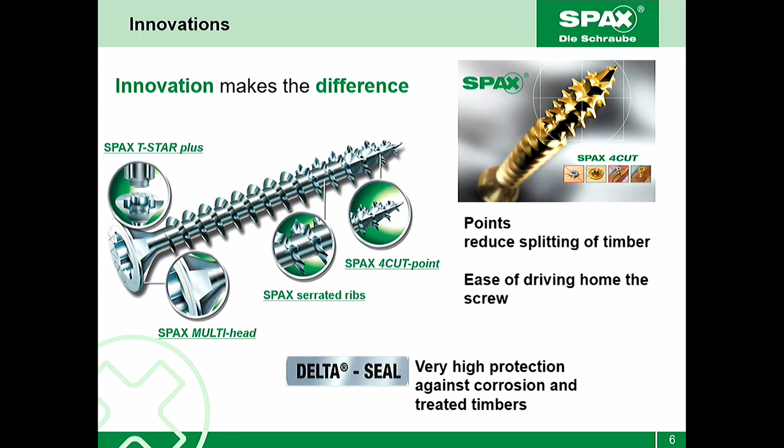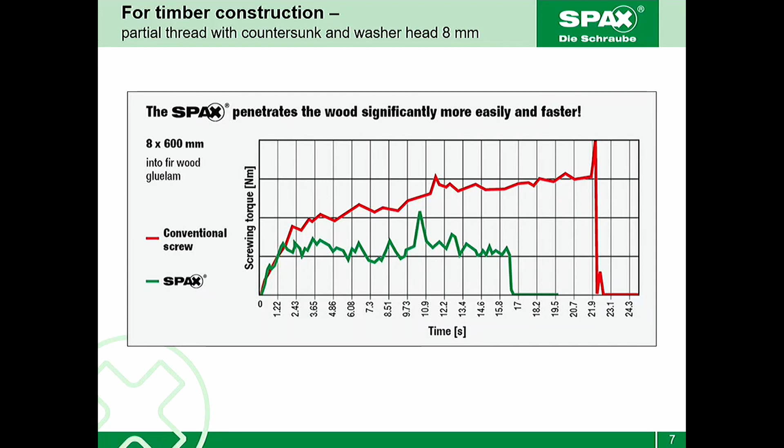Everything is made in Germany. We've still got the original plant, obviously expanded quite a bit and modernised after 194 years. So made in Germany, we can guarantee the quality of the products. We can provide a certificate of origin as well, what we call a TÜV certificate. So we have a clear commitment to the quality and security of our products.

I went over to the plant, the factory, beginning of last year, and I was just amazed at the quality control. Every single step of production, they're checking, and if something goes wrong, they get rid of the whole batch since the last check. They have computers checking the threads and everything like that, and once it comes back from the platers, it's checked again.

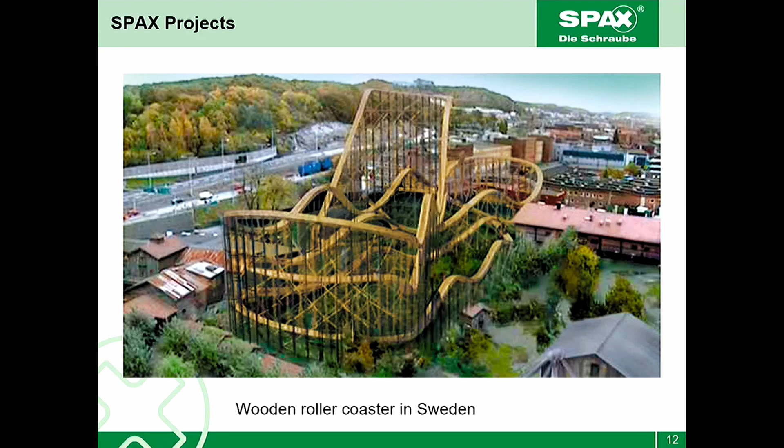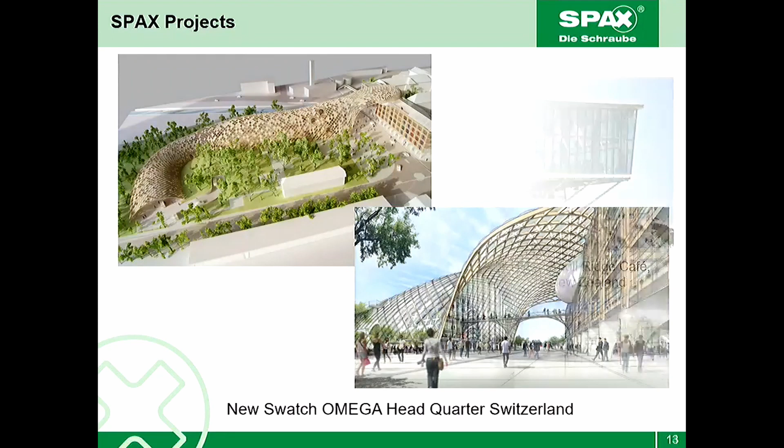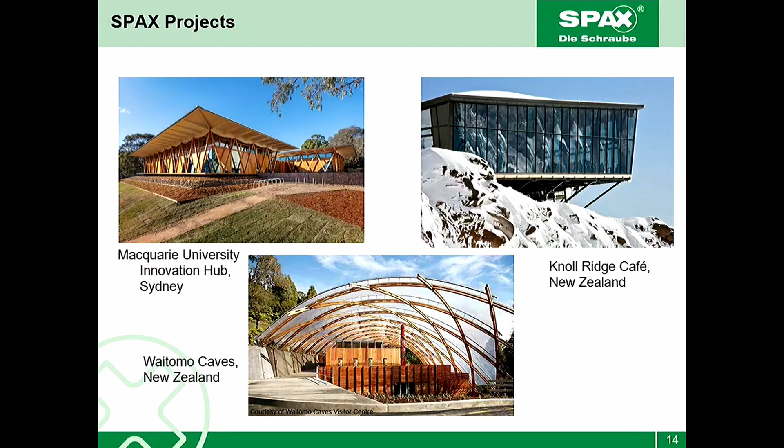A couple more local ones. You would have seen the Macquarie University Innovation Hub, which won a design award a couple of years ago. Knoll Ridge Cafe at Whakapapa, Waitomo Caves Visitor Centre as well, all SPAX screws. Catholic School in Sydney, Bunjil Place in Melbourne, won last year's Timber Design Award. That's an amazing structure as well.

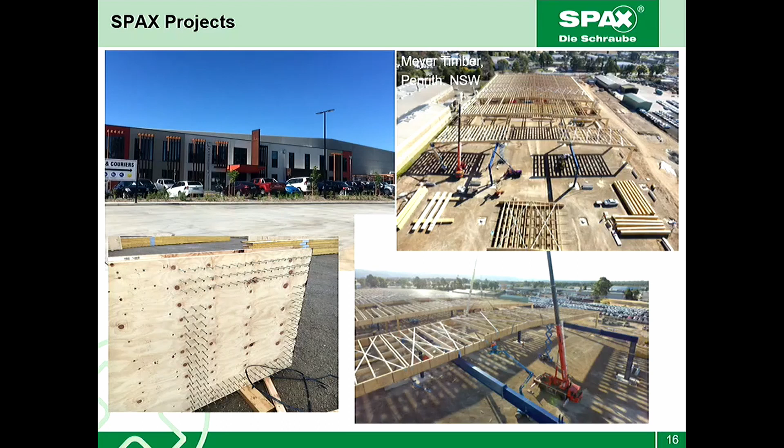Meyer Timber warehouse in Penrith. I don't know if you can see that very well, but quite large spans for your timber. And how it worked was, it's like a tongue and groove connection. So your tongue basically fits in here, you'll see this is cut out there, and it's just joined with all these SPAX screws around it. So that was a very clever design as well.

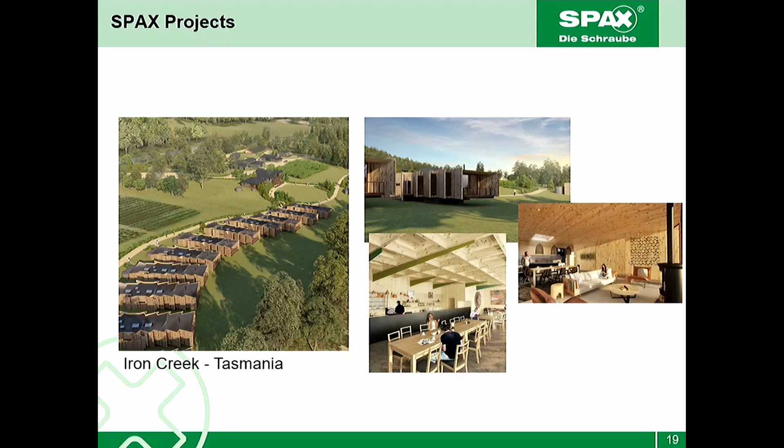Otago Polytechnic down the South Island, there's a lot of screws in that with XLAM as well. Housing New Zealand, so they're using all SPAX screws for that as well with the CLT. The new one is just starting this month, which is Iron Creek, Tasmania, which is a backpackers hostel. And that's my backyard, so we use SPAX screws anywhere.

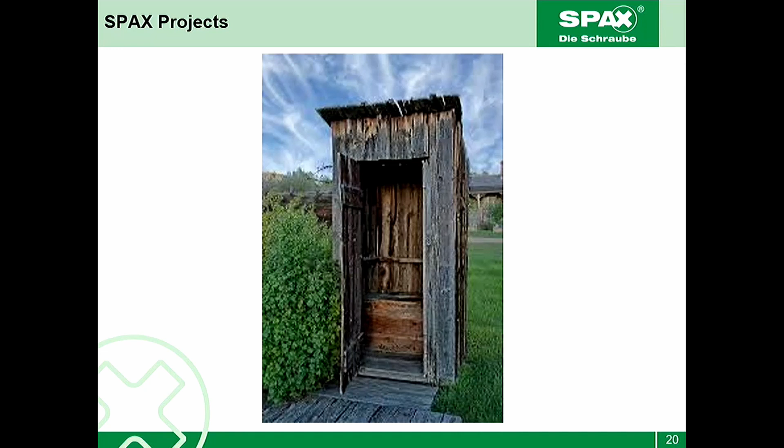Okay, so when you're looking at screws, there's different connection types you need to be looking at. Other areas like bolts, steel plates, coach screws, gang nails, things like that can be replaced these days with a modern screw.

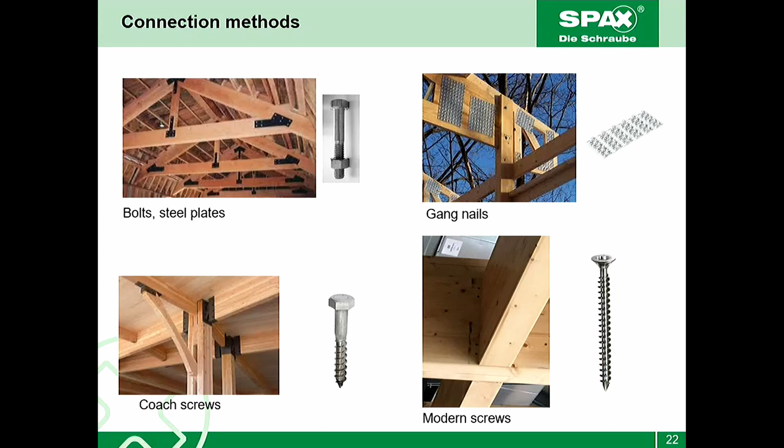Now, what are the advantages of modern screws these days? You're looking at aesthetics as a major one. So instead of having plates in a situation like that, you can use screws which are completely concealed, and you get a connection that looks like that. That was actually at Bunjil Place in Melbourne, those connections, using a lot of fully threaded cylinder head screws. So aesthetics is one advantage.

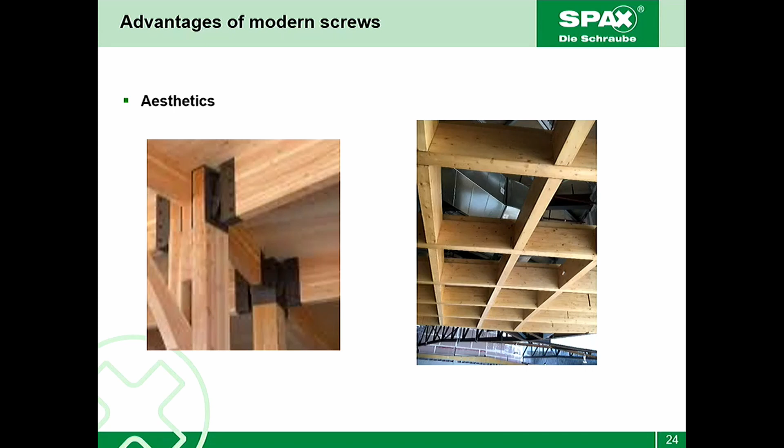Another one is fire reaction. Your screws can be driven inside the timber, below the char zone, so they're fully protected from fire. They're good for earthquake situations, for seismic - they're a ductile connection, and obviously ductile connections are preferred in most situations that way.

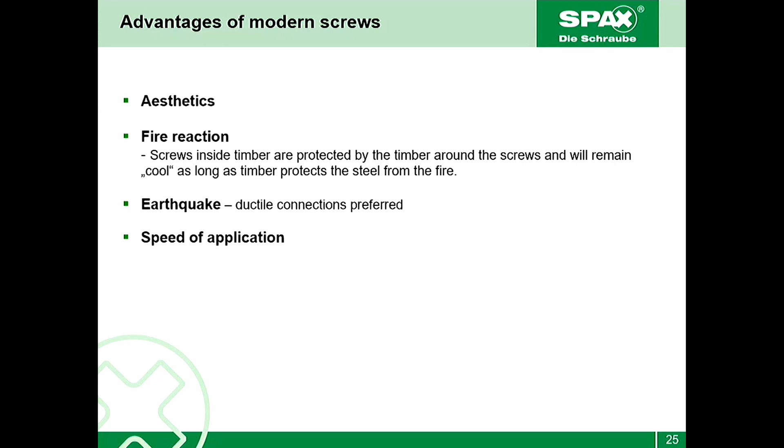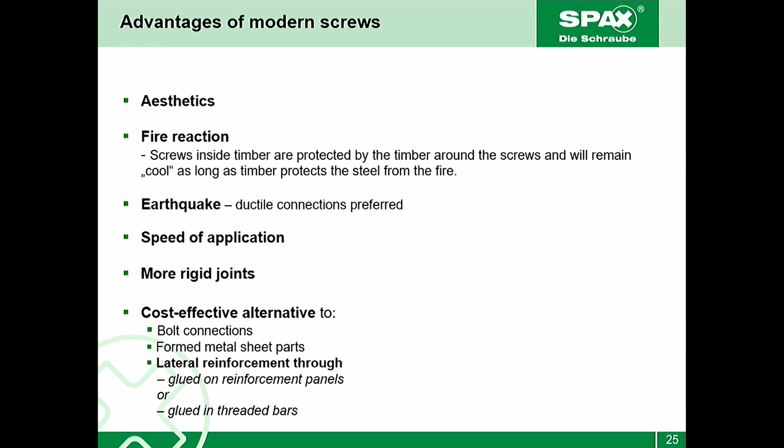Speed of application - they're a lot quicker to install than normal bolts and plates etc. They're a more rigid joint as well. So instead of a bolt, you might have a bit of a gap between the timber and your bolt, but where you screw, you don't have that, so it's a very rigid connection. They're also a cost-effective alternative to bolt connections, metal parts, lateral reinforcement, glued-in reinforcement panels and things like that, so they are very cost-effective in that way.

So some different applications where you can use screws. This is what we call a post and beam application. What you're doing here is using a partial thread screw to attach your beam to your post. You can see here the thread is completely in the post, whereas the shank is in the beam. The idea of that is to clamp the two together. So if you use a fully threaded screw in that to start with, that's going to draw them both apart, and you won't get a tight fixing. So in the post and beam application, start out by putting a partial threaded screw in to clamp them together.

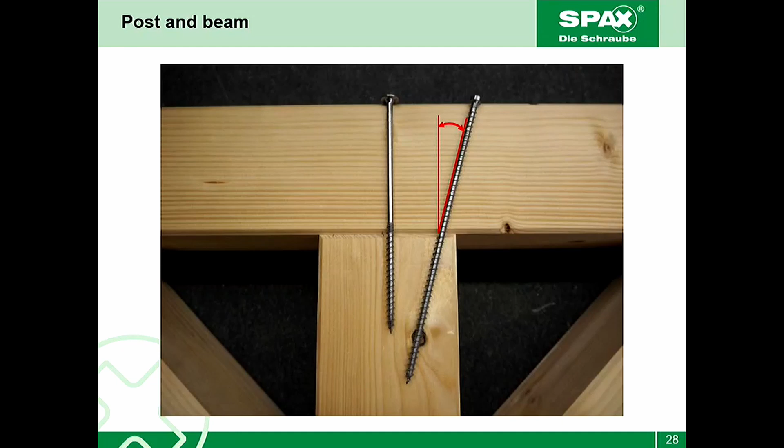So there's 4 fully threaded screws inclined, giving it an incredibly strong connection. Once those screws are in place, you can then remove that partially threaded screw, the washer head screw, because that's basically not doing anything after that. It's done its job.

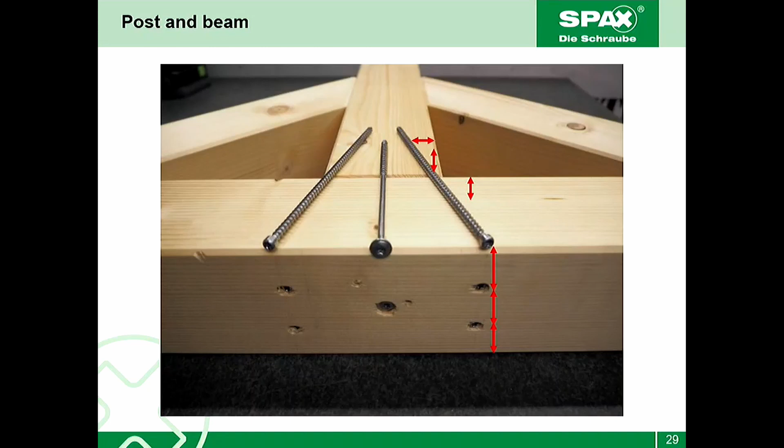You do the same thing with your bracing, whatever, as well.

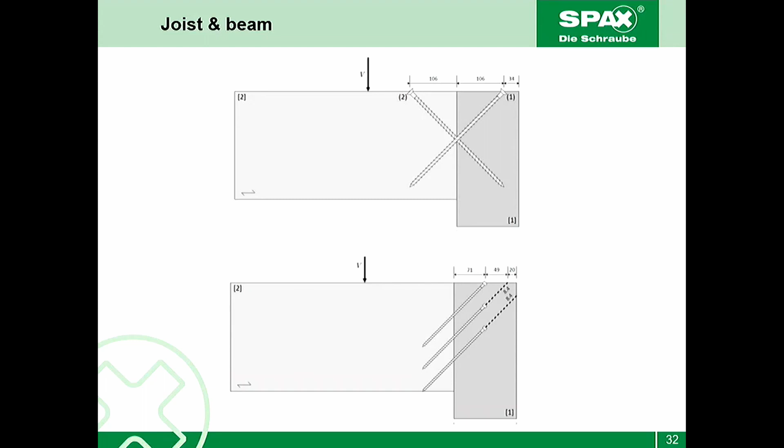So that's ideal instead of using L brackets or plates of any type.

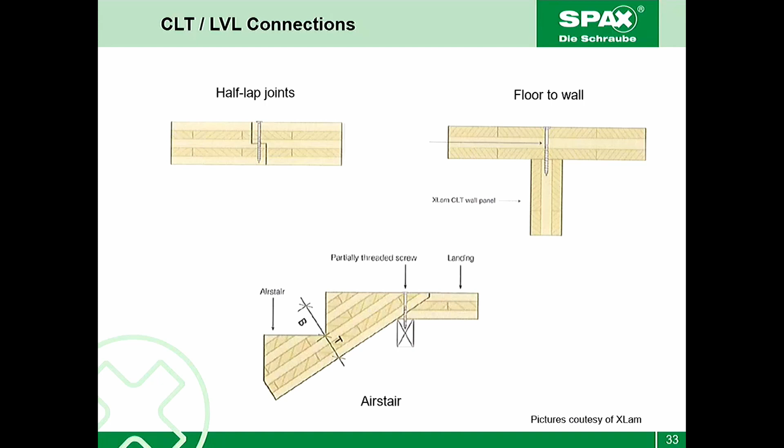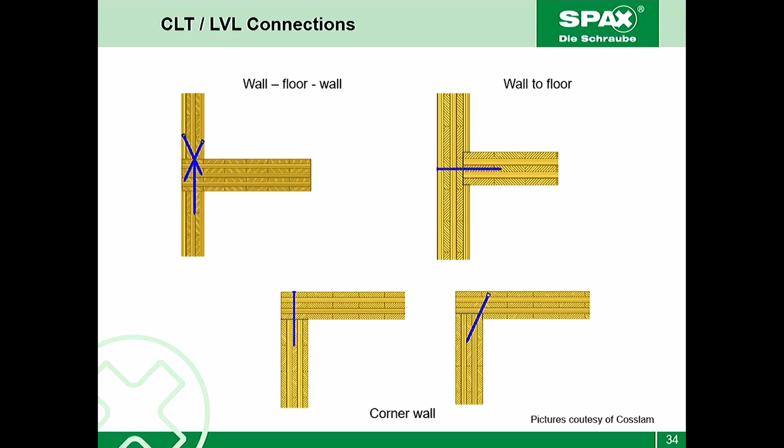For CLT and LVL connections, common ones are half-lap joints, floor-to-wall applications - the X-Lam air stair is quite a common one as well - and wall-to-floor applications. In that one here you can see screws going in diagonally, so you can use those instead of brackets for that application as well, and they're all hidden. Corner walls, wall-to-floor - any joints in CLT and LVL are very easy to do with your screws.

Tensile reinforcement is another common application for fully threaded screws. So with a notch beam, something like that, you get the situation where your weak point is here, and it'll tend to crack from that point backwards. So this will show you what happens in that case.

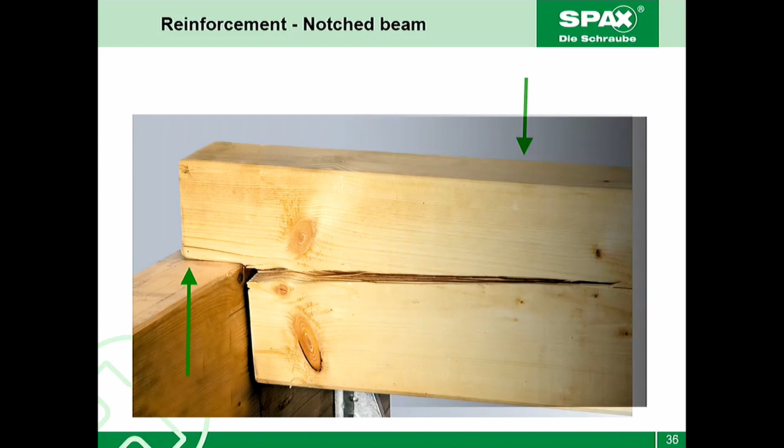No, that cracked very quickly. So it was only very low load as well - it's probably around about 10 kilonewtons before that cracked.

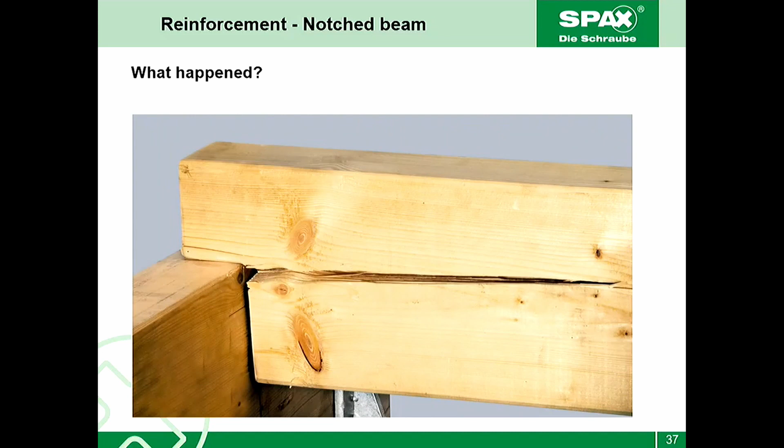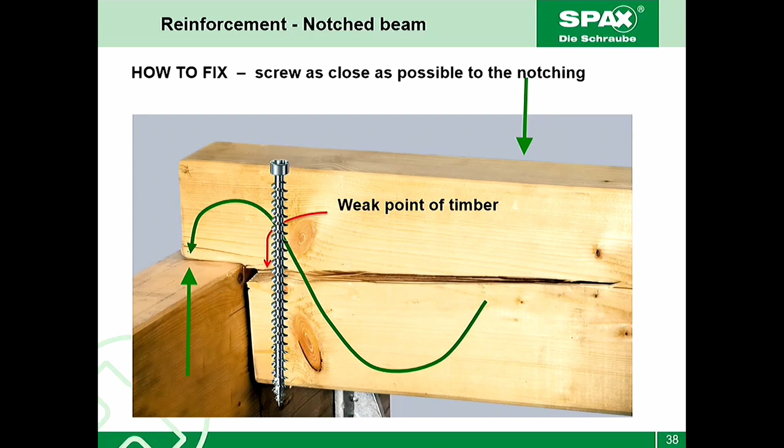Okay, so to overcome that - that's your weak point - how do you fix that problem? You put a fully threaded screw in as close as possible to the notch. So that's going to hold your timber together and stop it from cracking. You can put it in beforehand to stop any potential crack, or you can put it in afterwards to hold it together after it's cracked as well. Obviously you don't want it to crack in the first place.

So in this case, this side was already reinforced before - they put a couple of fully threaded screws in this side. So you'll see what happens now, and have a look at the load when it's at 10 as well.

15... just the same piece of timber, 20. You can see where that crack was. 30, 35, 40. You can see that bending as well, 45, 50.

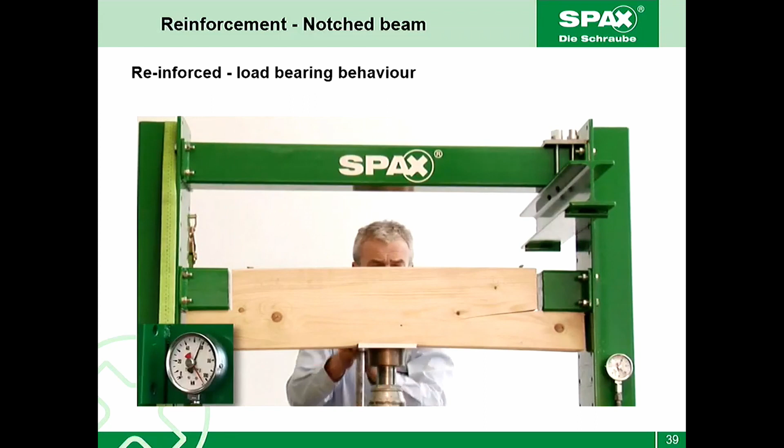I hate to show - there's nobody from workplace health and safety, is there? They don't seem to worry about it so much in Germany, I don't know.

But yeah, so you can see what happens when you reinforce your notch beam like that. It got up to about 60 kilonewtons, so a big increase in load as well.

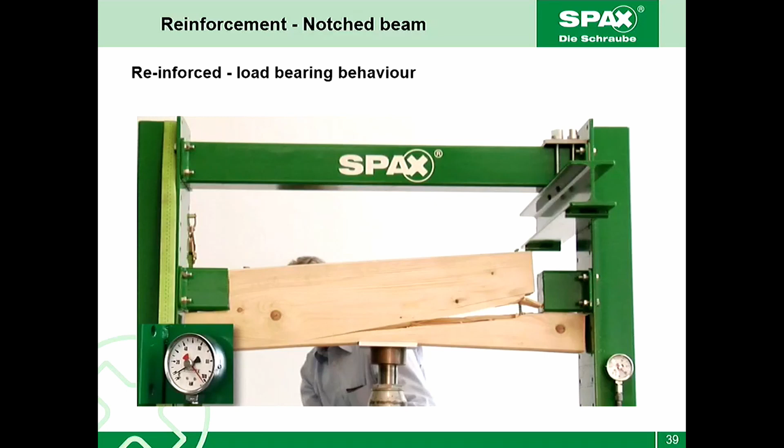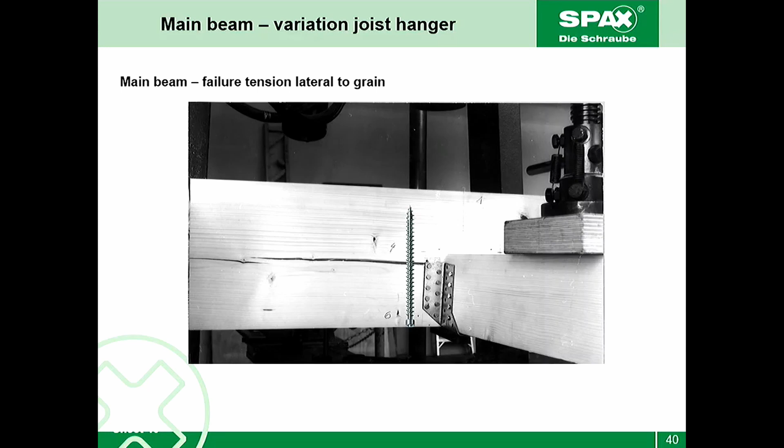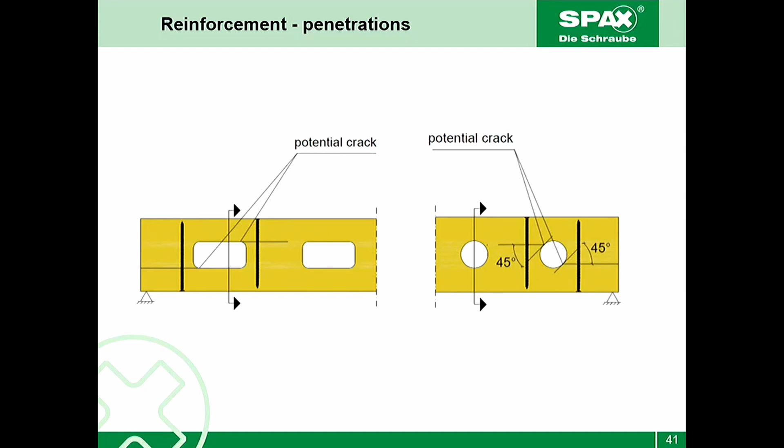So other applications where you can reinforce - this one here, we're using a bracket, what have you, to stop you cracking there. Stop any potential cracking in reinforcement, in penetrations in glulam beams, for example. So your potential crack would be along here in those cases. There is information in the Eurocode and the ETA on how to design for that, for reinforcing in that area.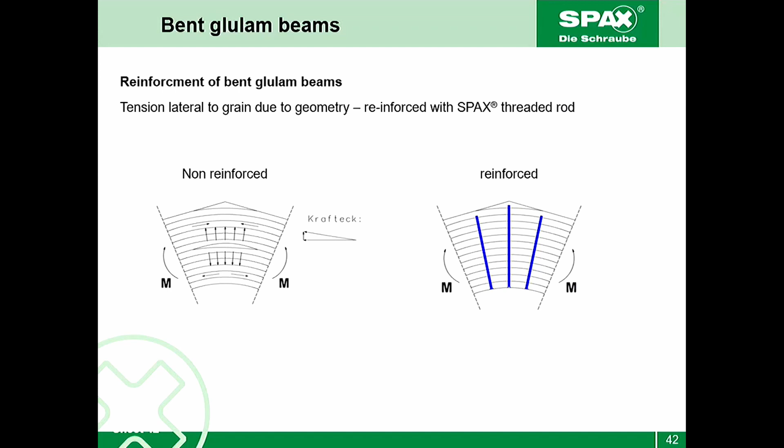Bent glulam beams as well - they might tend to delaminate at some stage, so reinforce it with screws. We actually have a 16mm diameter screw specifically used for that application, made up to 3 meters long as well.

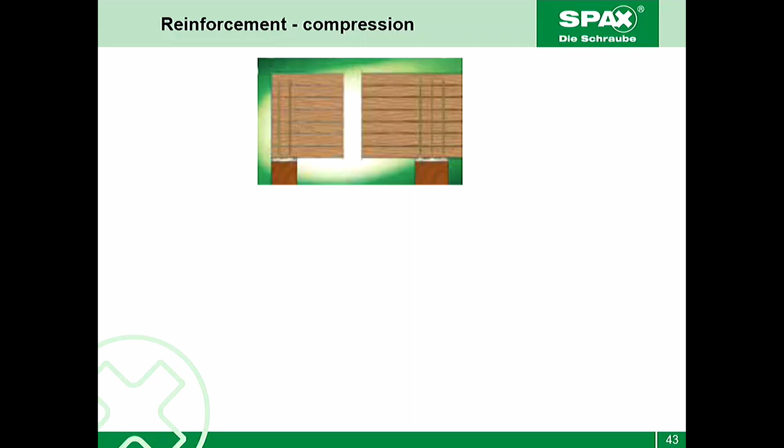So reinforcement in compression as well, becoming more of an issue as timber buildings are getting taller and taller. What's going to obviously happen, if you get too much load on your timber, it'll crush like that. So putting fully threaded screws to reinforce it in compression, you don't get that crushing. Without the reinforcement, in this case there was 60 kilonewtons loading. With the reinforcement, there was no damage at 100 kilonewtons loading, which is the limit of the test machine.

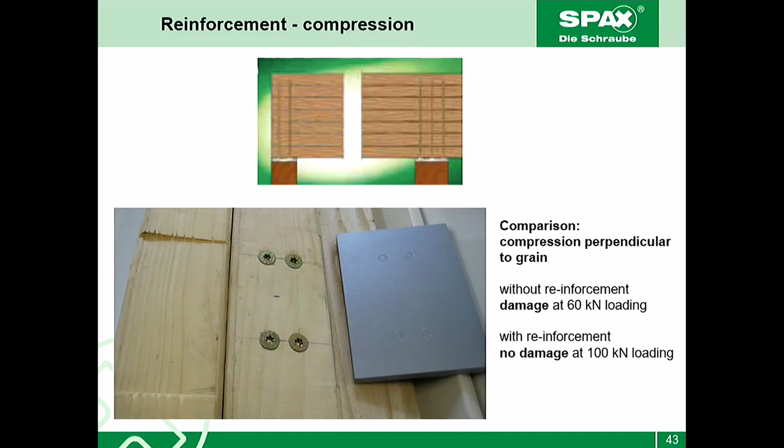So what are your considerations when you're designing with screws? We'll go back to basics. If you already know a lot of this, just bear with me, okay?

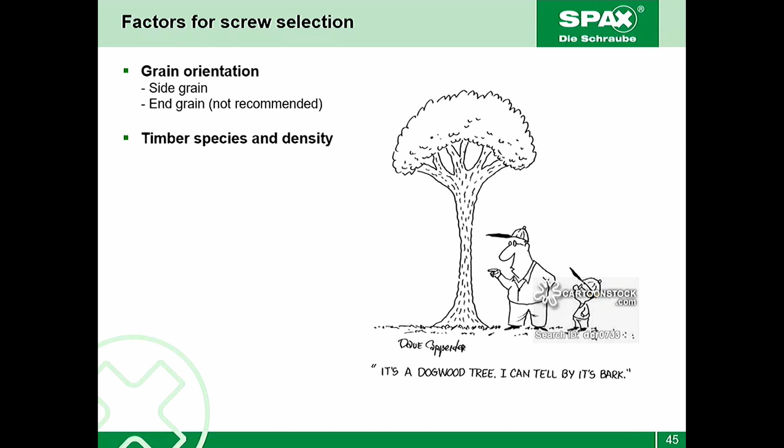Some of the factors to consider: obviously grain orientation, so you're going into the side grain or the end grain. Timber species and density - the denser the timber, the higher the load capacity, generally speaking. Edge distance, end distance and spacing all need to be considered to prevent splitting and cracking. The connection type will determine the style of head you're using and the thread type, which we'll cover in a moment.

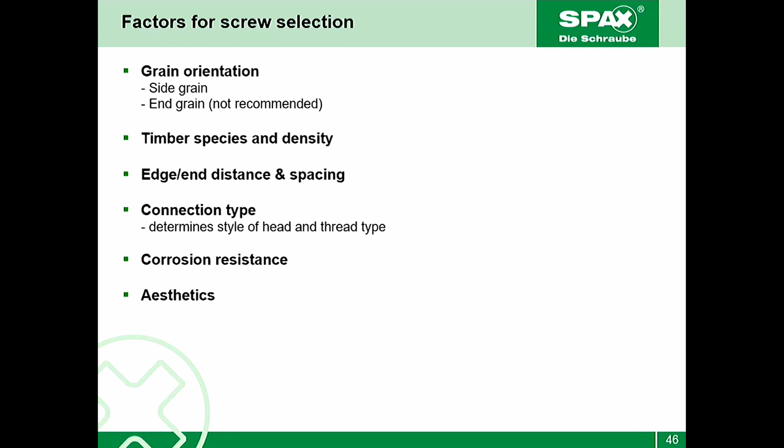Corrosion resistance obviously needs to be considered - where is it, is it next to the sea or inland? Aesthetics - do you want the screws to be hidden? Fire resistance we've mentioned, and ease of installation.

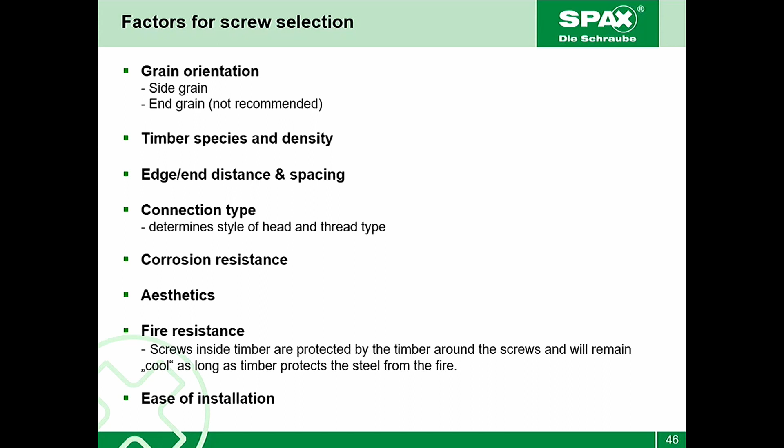So selecting your screws, there's a couple of considerations. One is the head type. There's a few different head types for screws. A washer head is a large head on the end, with a large bearing area, ideal for clamping pieces together. A countersunk head is for flush fixing. A cylinder head is used when you want to drill the screw in deeper into the timber below the surface. And a hex head is another variety as well.

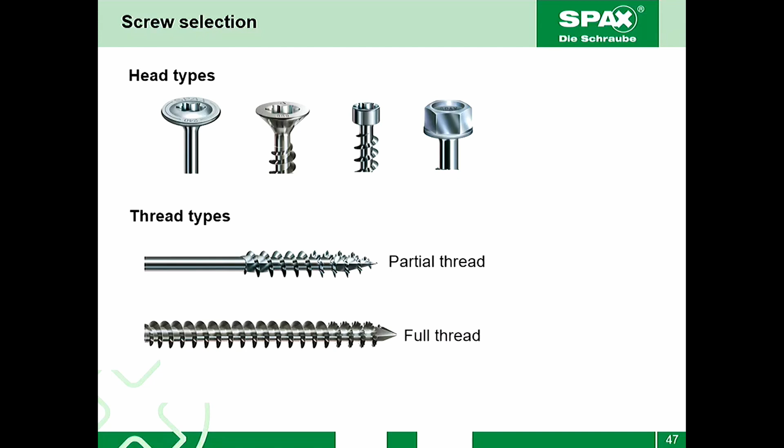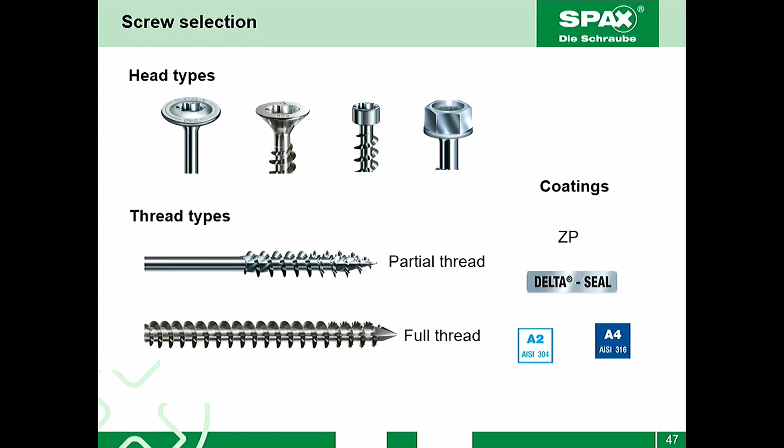The thread type you need to determine depends on your application. You saw before in that post and beam application, partial thread is used for clamping your timbers together, and a full thread is used for a strong connection. A little bit more information on that in a moment. And the coatings, as I mentioned, you need to be looking at.

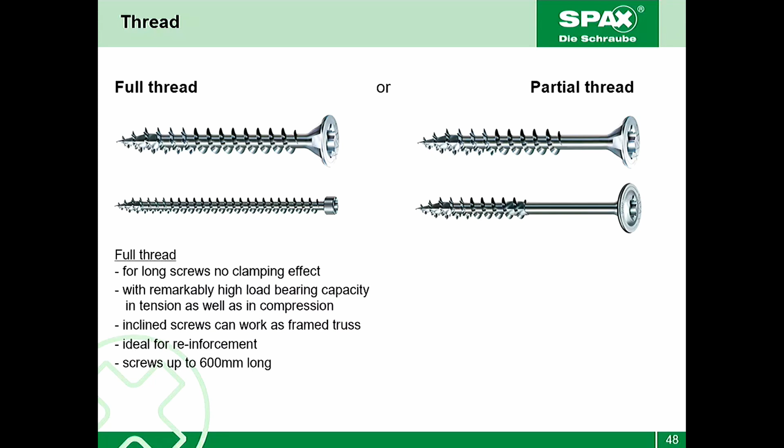So, full thread or partial thread, which one are you going to use? Your full thread is more for your longer screws. It doesn't have a clamping effect. They have very high load-bearing capacity, particularly in tension, but also in compression for your reinforcement, etc. Incline screws can work as a frame truss, ideal for reinforcement, and the screws come available up to about 600 millimeters long.

Partial thread, as I said, is for a clamping effect, for pulling pieces together. The washer head will give you a much better clamping effect, but your countersunk head will give you a flush fixing.

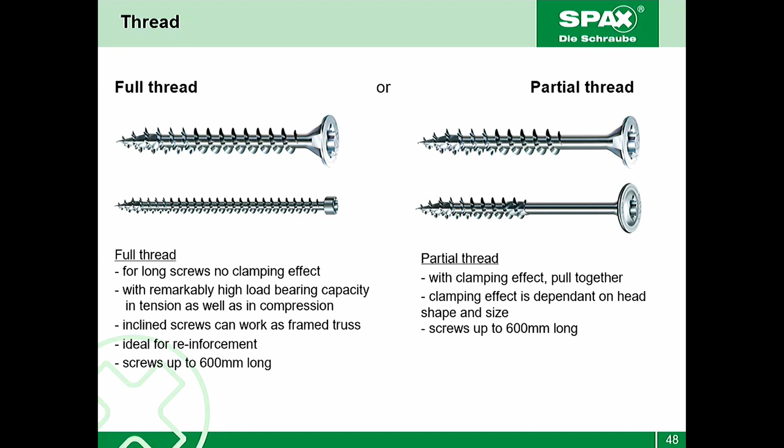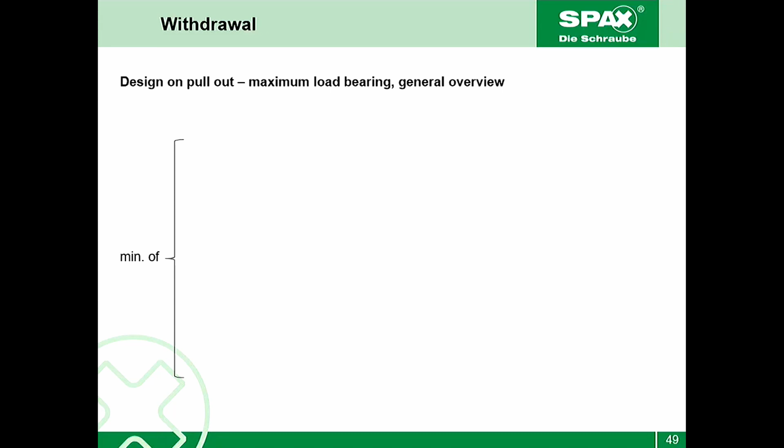Okay, a bit more on the technical side of things. In terms of withdrawal, there's 3 different failure modes. The first failure mode is thread pull out of the wood. Second failure mode is the tensile strength of the steel, of the screw - if the thread is long enough in your screw, the tensile strength is going to govern, so your screw will actually break if it's long enough. And failure mode 3 is head pull through, which is the maximum of either the actual head or the thread pulling through. I'll come back to that in a moment.

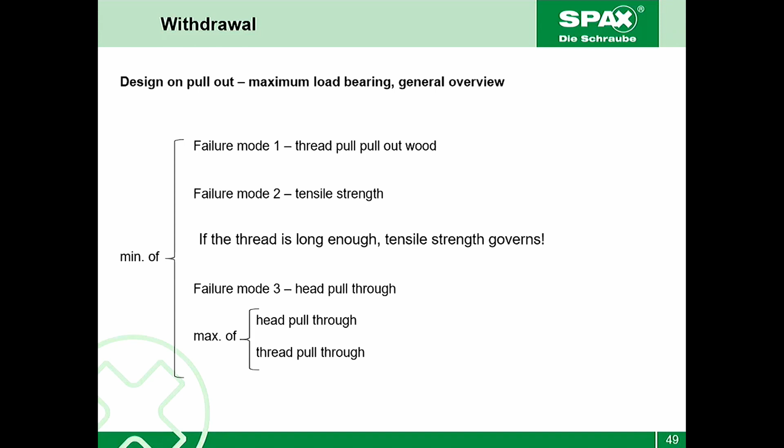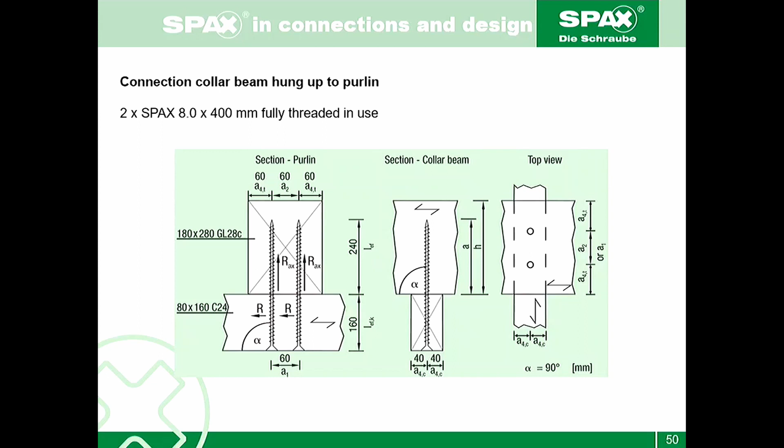So if we look at an example of a connection collar beam hung up to a purlin, you're looking at 2, 8 by 400 millimeter fully threaded screws in this case. Your failure mode 1 is thread pull out of this, your base timber here. And this is the formula that you use, or the equation.

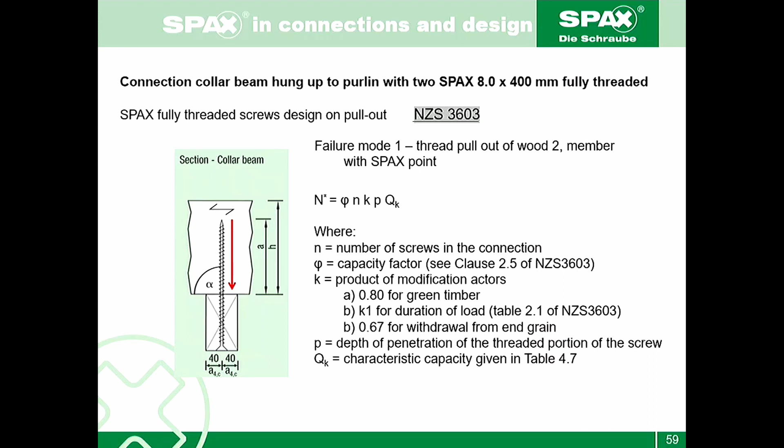So comparing the two with the ETA, the Eurocode versus 3603, with those different equations, you're looking at Eurocode's 25.6 kilonewtons and 3603's 24.2. Not a lot of difference between the two in this case. That might vary depending on the type of screw you're using, the diameter, length, etc., but in this case, not a lot of difference.

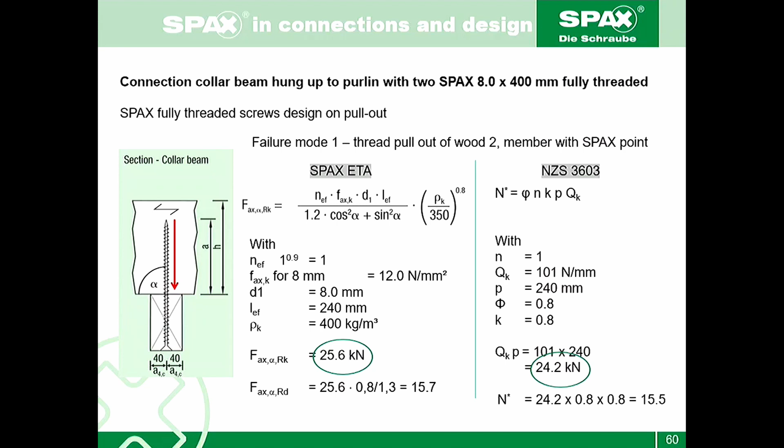And even the safety factors and modification factors are not a lot different either, so you're getting a very similar result in the end. Your tensile strength is obviously not going to vary, your steel doesn't vary between the two codes. Failure mode 3, as I mentioned, is head pull through.

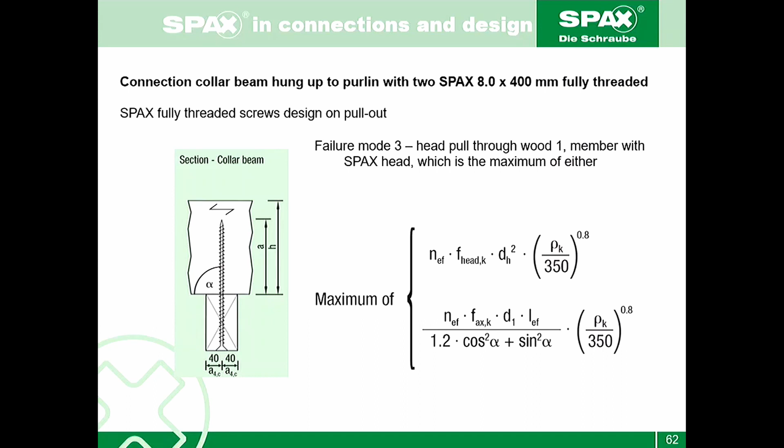So you have either, it's the maximum of the two. That one is actually head pull over, so your timber is trying to pull over the head of the screw - that's your equation for that one. Or your timber is going to try and pull over the thread of that section, so obviously if it's only a partially threaded screw, that's not taken into account, it's only that first part. So generally this would be your maximum out of the two - it looks at the maximum of those two, not the minimum.

Why is that? Because once, if this tries to give way, that is still going to hold on to it.

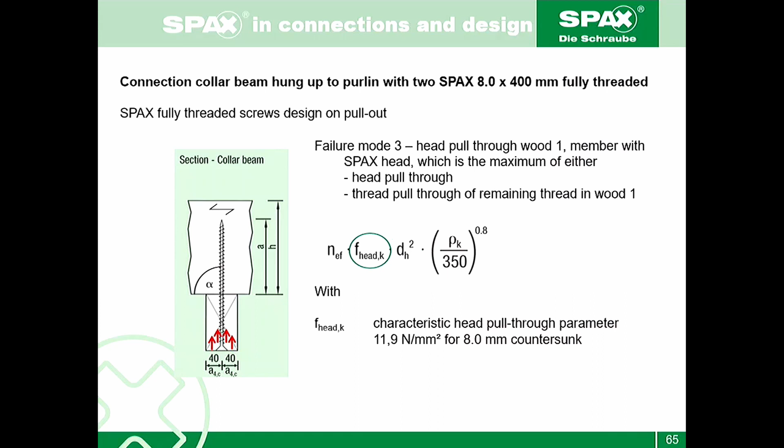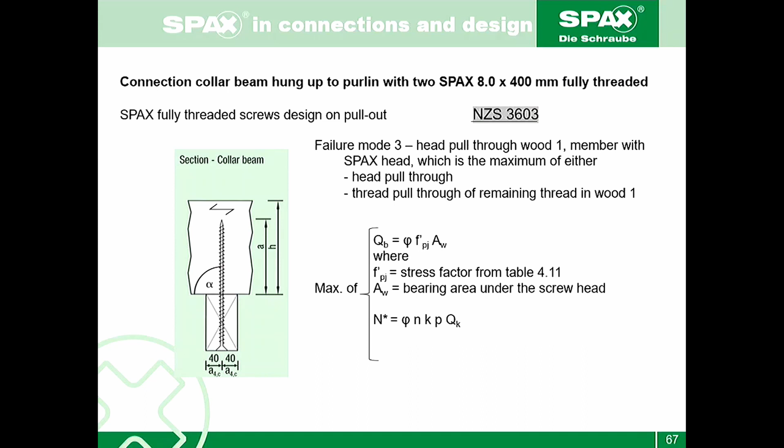So you're looking at, yeah - I won't bore you with that. The NZS 3603 doesn't really look at head pull-through. It does if you search through, and you'll find this equation in there as well, which looks at the bearing area under the screw head and a stress factor as well. So you can calculate it, but it's not easy to actually find that and do it. So most of the time it's actually ignored in the design, which it shouldn't be.

It's quite often the actual failure mode in these applications. So if you're looking at the Eurocode, in this case it's the maximum of these two, 1.85 or 8.8, okay, and 3603, 1.98 versus 8.7. Again, so very similar.

So, okay, in that application we were looking at before, just summarising your failure mode 1, you had those 25 and 24 up the top, tensile strength of 17, your head pull through 1.85, 1.98, and then 14.3, 13.6.

So the minimum of all those is not that one, but it's this one here - 14.3 for the Eurocode, 13.6 for 3603. And then applying your modification factors and safety factors, you're down to these figures. So, as I said, very similar results between the two.

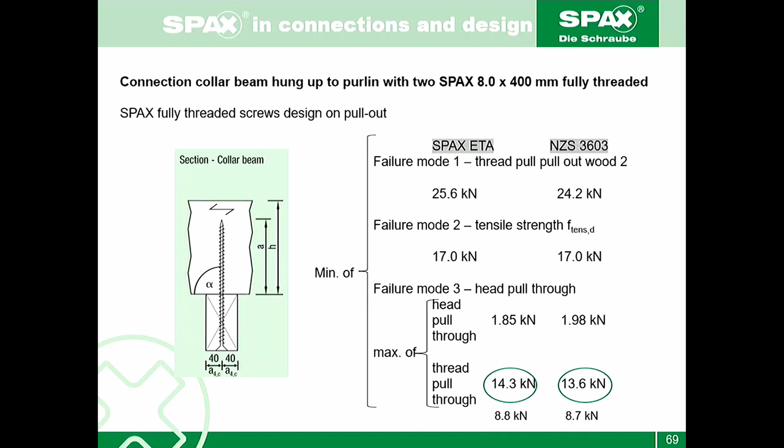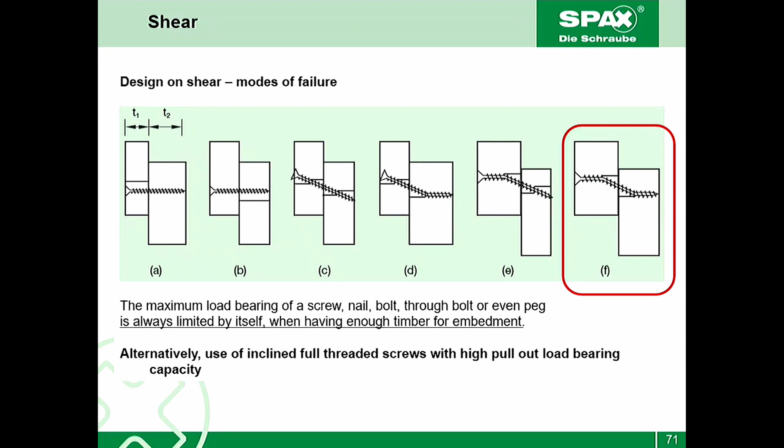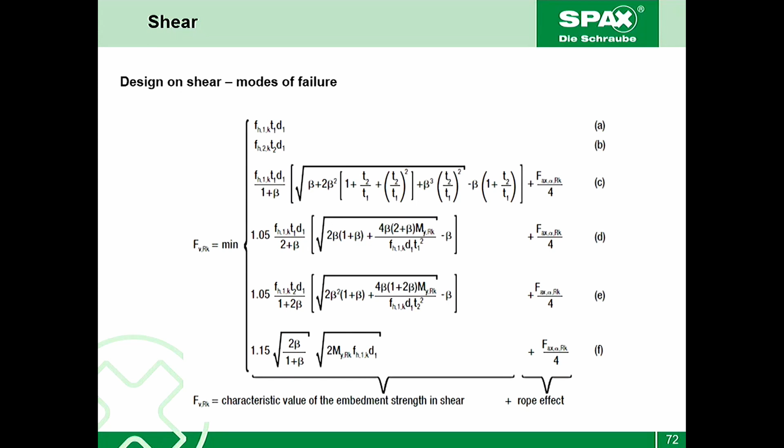Okay, don't worry about that. There's quite a difference when you come to shear. You're looking at, in shear, in the Eurocode, there's 6 different failure modes. The best failure mode you can have is this one on the end. There are all these different equations for determining your shear capacity of your screw - this is what we call Johansen's yield theory.

So I won't go through all that, but you don't have to calculate all those. It's all basically tabulated for you, and you can just work from tables.

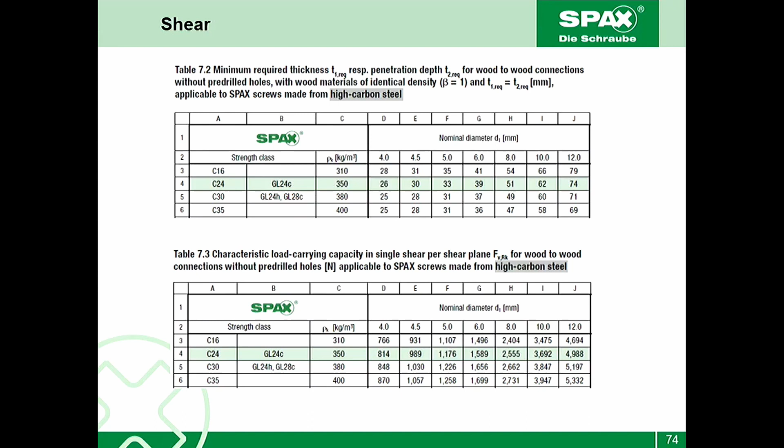In shear with the Eurocode, you have an added extra bonus, which is called the rope effect, which is not considered in 3603, where the head of the screw acts basically like a piston or piston rod, and it resists any force. As that screw is trying to shear, that head is preventing it from going any further, so you get that effect of it pulling back on your timber to stop it from shearing as well. So I'll show you in a moment.

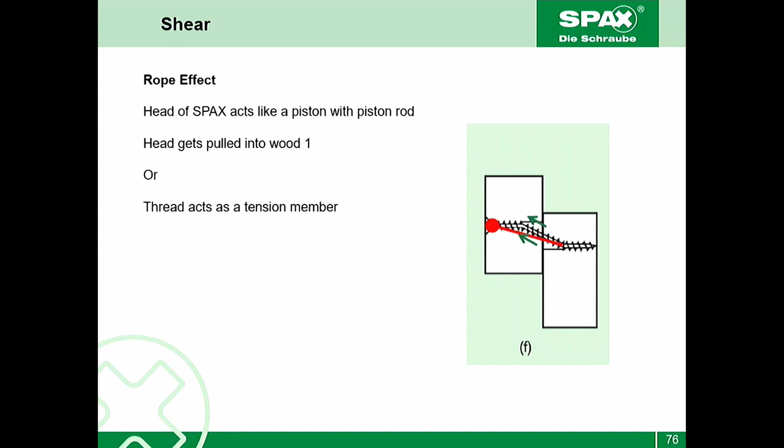On the other end, you're getting the thread acting in the same way. So the rope effect is really a quarter of your tensile capacity, or your withdrawal capacity of the screw, and that is added to your shear load or shear capacity of the screw overall.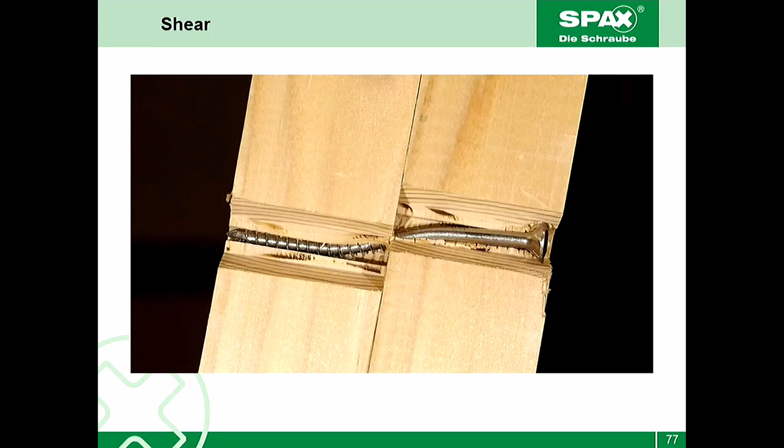Then you see that head is resisting movement of the screw, and the thread on this end is resisting as well, so that's adding to your shear capacity.

So if we look at an 8x120 washer head screw, for example, the characteristic shear capacity per screw, just going from tables: 2.59 in the Eurocode versus 2.63 for the 3603. But adding the rope effect gives you an extra 1.44 kilonewtons, giving you 4.03 kilonewtons all up for the designer by Eurocode. So comparing with 2.63, that's quite a big difference between the two - that's where your major difference is between these two codes.

When pre-drilling, in shear, you can actually get an increase in load capacity with the Eurocode. So you can increase that up to 5 kilonewtons, whereas 3603 does not consider that. 3603 actually says your holes must be pre-drilled, whereas Eurocode basically assumes you're not pre-drilling.

If you're using a countersunk screw with the lower head pull through, you're going to get a lower rope effect and therefore a lower shear capacity - so 3.35. And again, 3603 doesn't look at your different head types because it doesn't consider the rope effect, so same capacity.

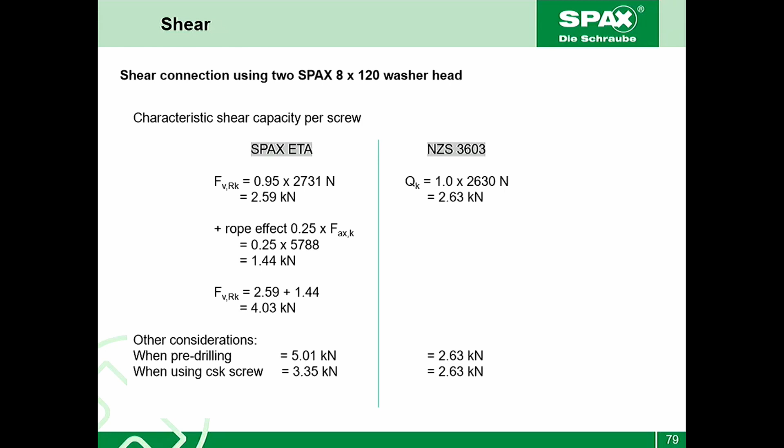Designing for incline screws, using an 8x260 cylinder head screw. It's a minimum of withdrawal of the threaded length in beam 1. Beam 1 is this one here, so you've got your cross screws. Your threaded part in that beam calculates to 13.6 kilonewtons.

And withdrawal of the threaded length in the joist. So in your beam here, your screw is basically 90 degrees to the grain, whereas on this one here, your grain is going this direction, so that's 45 degrees to the grain. So you have a reduction factor on that, and it ends up being 12.3 kilonewtons.

Tensile strength of the screw obviously doesn't come into it. Head pull through doesn't come into it either. And then you have a verification on here as well.

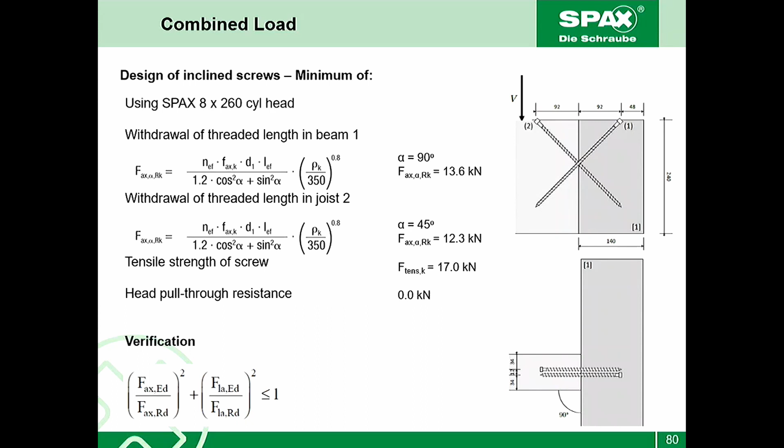Okay, so it's very simple actually to design incline screws in a joist and beam application. 3603 doesn't really look at that sort of application either. That sort of application was used in this project, in this house as well. So again, you can't see the screws at all.

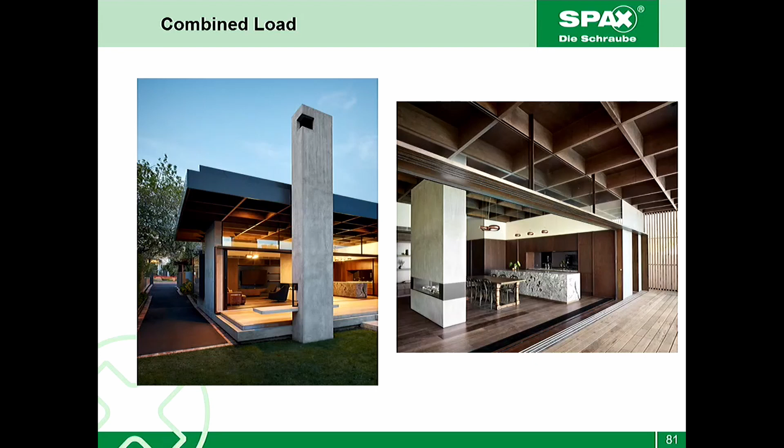Spacing and edge distances actually work out similar in many ways, but if you look at the Eurocode versus the 3603, the main difference is Eurocode looks at the thread diameter and 3603 looks at the shank diameter. So something you need to be aware of as well.

If you're designing with Eurocode, you can't swap over halfway through to NZS 3603. You can't combine the two. It has to be all one or the other. So there's a few differences there. Probably the main one is the spacing parallel to the grain.

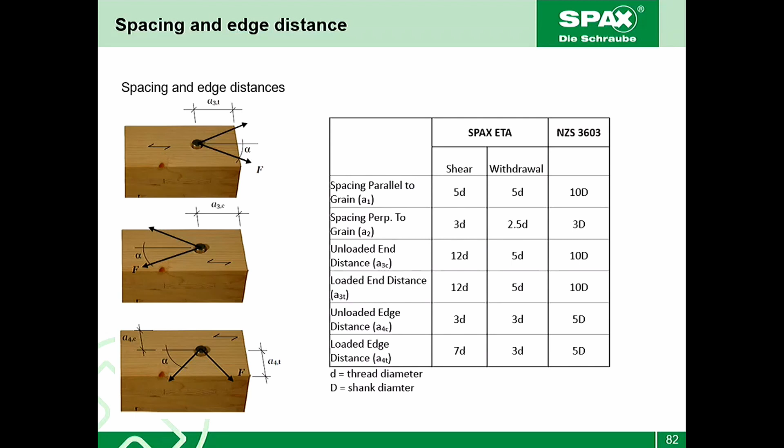And 3603 doesn't actually consider the direction of the load either. So Eurocode looks at the direction of the load, whether it's going towards the edge or away from the edge. So it's a bit more complicated, but it's much more logical, so it's a better way to do it.

That's actually looking at an 8mm screw, and that gives you some factors, all your actual distances. So parallel to the grain, Eurocode's actually better. Perpendicular to the grain, 3603 is better. So it just depends on the application where you're using it.

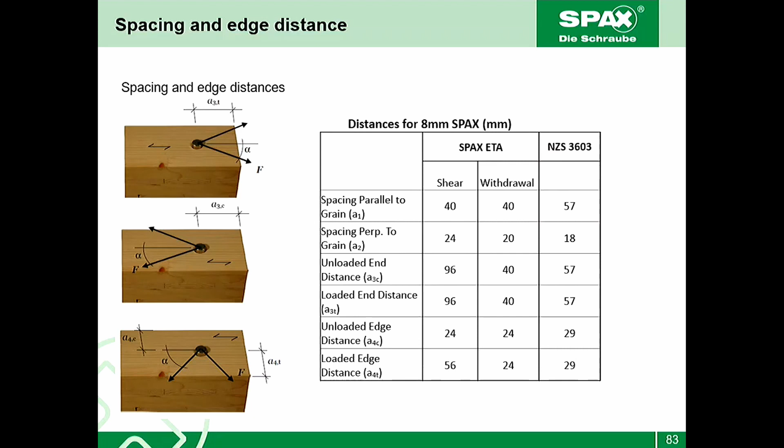With modern screws these days, generally they're self-tapping screws, so you can drill them into timber without pre-drilling, unless you're going into hardwood in particular. But there are still advantages to pre-drilling. You get increased load capacity, particularly when your load's in shear. You get reduced spacing, edge distance and timber thickness as well.

It's quicker to install, surprisingly quicker. There's less on-site labour, so it reduces your costs. Pre-drilling can be a locating guide for easy installation as well. Quality control, particularly if your screws are at an angle, you pre-drill at that angle so you know it's going in exactly the right angle into your timber. And on-site, it's greater battery life as well, so less torque required when you're going into a hole, so they drill a lot more, put a lot more screws in per battery.

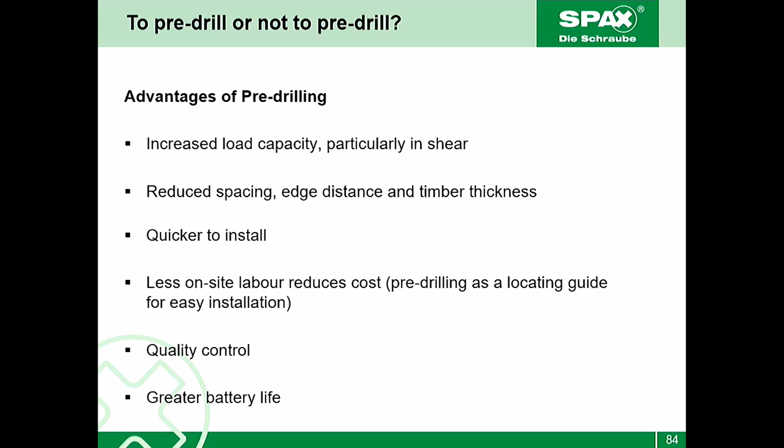So just to summarise a little bit between Eurocode and NZS 3603. 3603 looks at joint strength groups based on design densities, as I mentioned before. Eurocode looks at characteristic densities, so there is a difference between the two, so you need to be aware of that. The characteristic density you saw on those equations is 350, that's for a softwood, probably softer than radiata pine. On testing, we've estimated radiata pine has a characteristic density of about 400, whereas the design density is about 550. So that's the difference we're talking about.

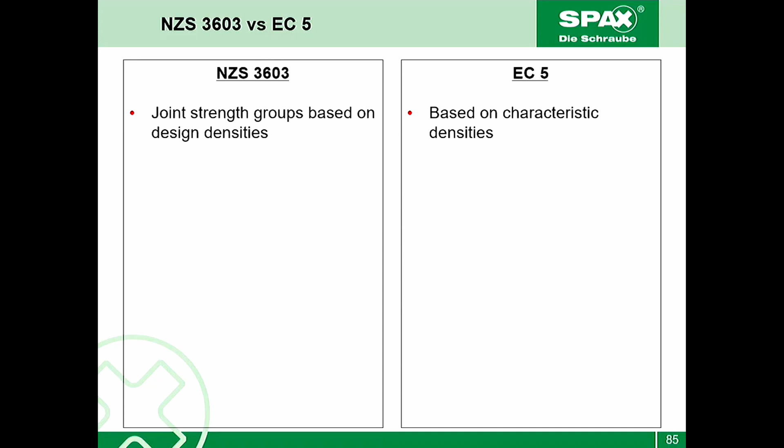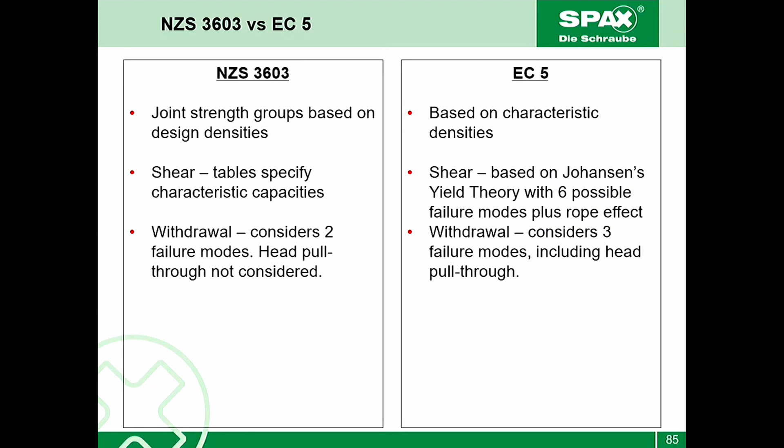In shear, 3603 gives tables which specify characteristic capacities. Eurocode looks at is based on the Johansen's yield theory with the 6 possible failure modes plus the rope effect, as we said. In withdrawal, 3603 really only looks at 2 failure modes, head pull through is not considered. Eurocode looks at 3 failure modes, including the head pull through.

3603 has a simplified edge distance and spacing, whereas Eurocode minimum distances are more complicated, but they're more logical, as I said. And 3603, all values are applied to pre-drilled holes only. With the Eurocode, pre-drilling is not necessary, but you can calculate for higher capacity with a pre-drilled hole. There's something else I thought of, but I can't remember what it was now.